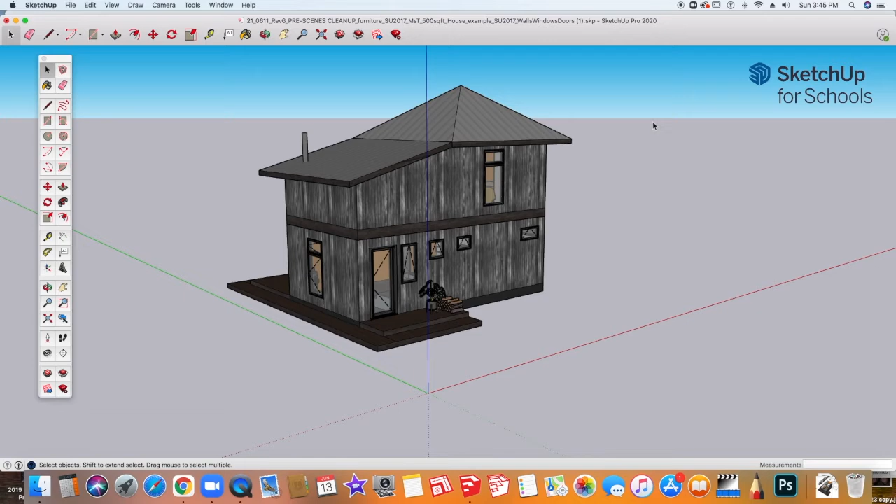An example of this is my current model, but an example of what we'll be doing is as follows. You see across the top here are different scenes, and these allow us to quickly toggle through, and you're going to make two 3/4 views, a front view in elevation, a right view in elevation, back and left views.

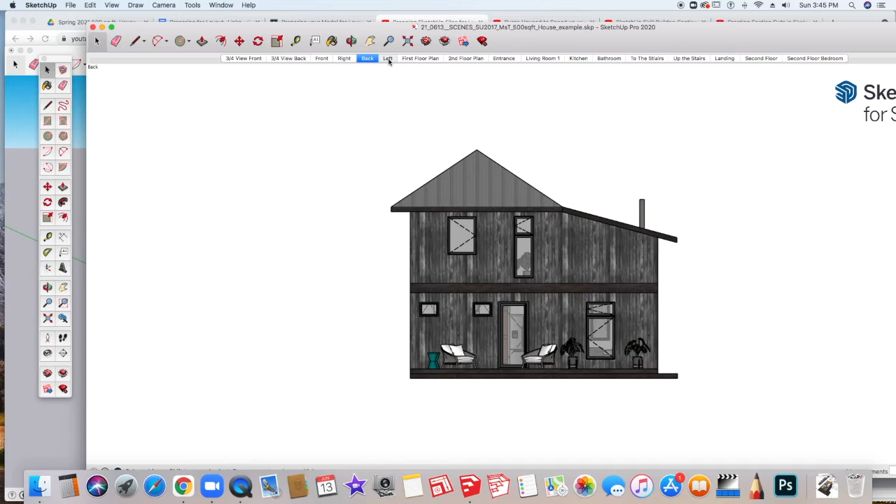Then we're going to do a floor plan. This is the first floor, the second floor, if you have a second floor, and then we're going to do some interior views. I only ask that you have at least 2 interior views, but you may want to do more once you get the hang of how this works.

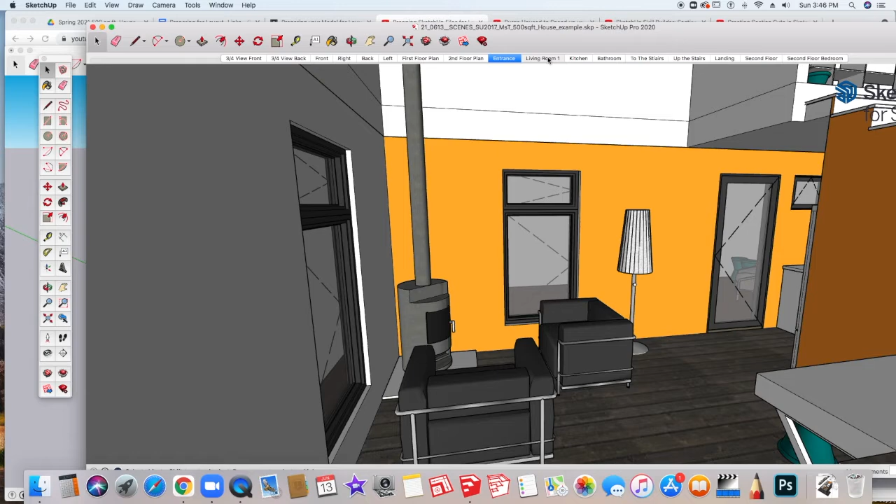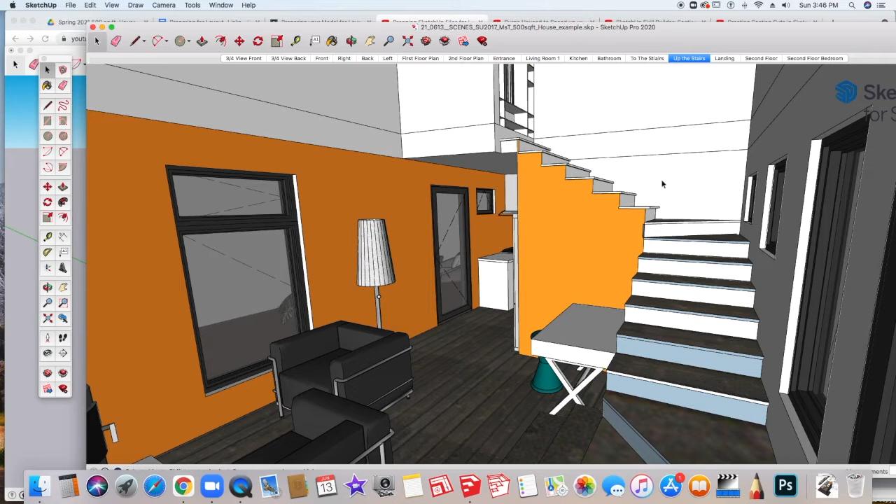So mine include both the entrance, another picture looking from the kitchen into the living room, then from the back door looking into the kitchen, the bathroom looking toward the pocket door and kitchen opening, and then back to the back door looking at the stairway going up, standing at the first landing, and then standing at the second landing looking into the living room, and then at the top of the second floor looking down into the living room area, and then looking to the left and looking into the bedroom.

To create these views, we're first going to have to start with making some section views. We do this first so that it doesn't become complicated afterward. There's a method to the progression of how we work.

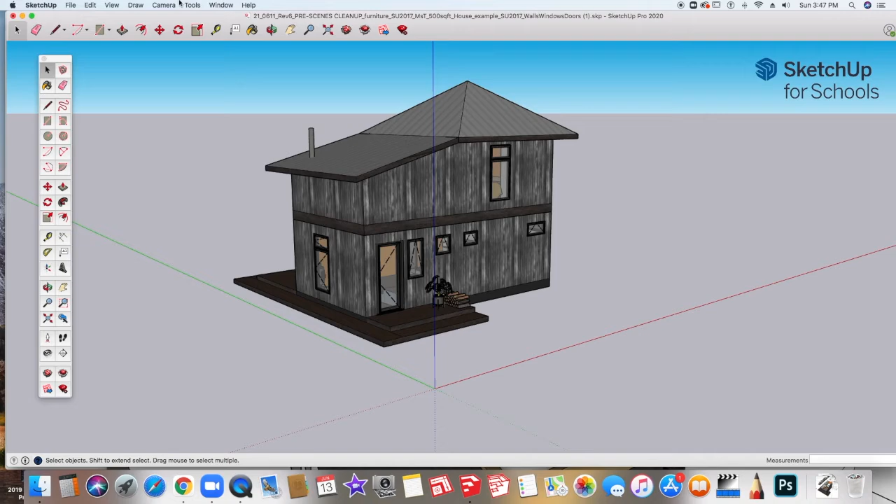In order to do the section views, we're going to be opening a few new windows that you haven't used before. This will include the Styles window, and all these are located up at the window upper menu, Outliner window, and we're also going to get the Scenes window up. Now remember, you can move these around and utilize them so that you can sort of see what you're doing.

The first thing we're going to use is the section tool. The section tool is located down here at sort of the bottom of the toolbar. These are navigation tools. This is similar to Google Earth. If you put a person in a particular location, it will set up the view from that area, and then this is the eyeball of that person.

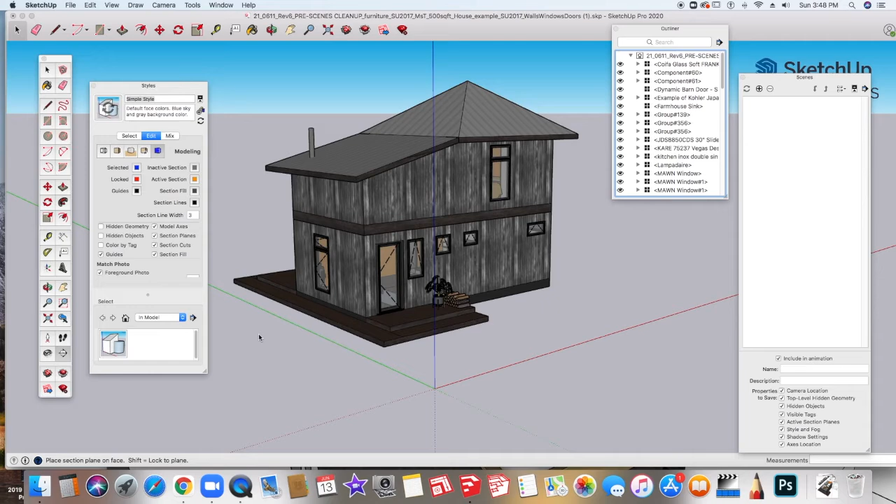But right now we're going to use the section plane. Section planes work like a lot of other tools in SketchUp in that they kind of glom onto the different axes. So the red axis, the green axis, and also the blue axis.

Now we're doing floor plans, so obviously we're going to want to go from the top view, and you can control these just like you can control the other tools with the arrow keys. So left is green, right is red, and blue is straight up and down.

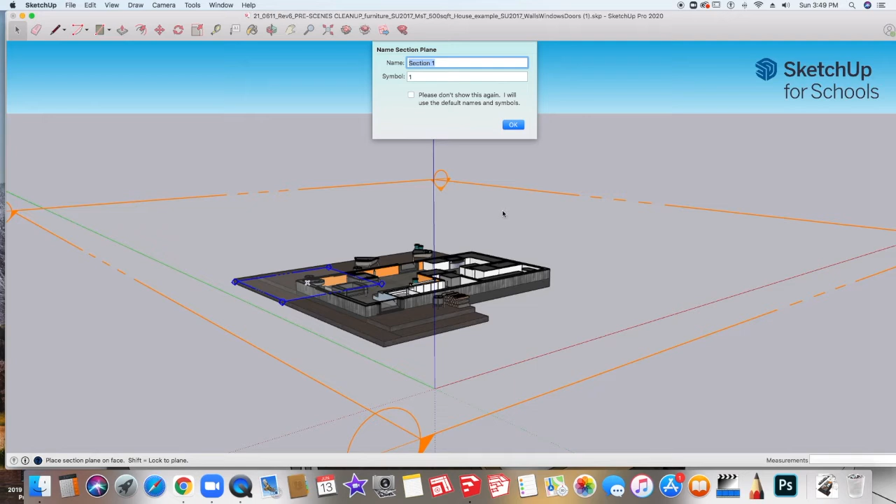I'm going to go ahead and click that, and you can see that this is probably making a large section plane, but don't worry about that right now. You're going to get a little box that's going to come up, and you're going to make a section plane name. You're going to leave the word section in it because we're going to be looking at it in the outliner tool, which organizes everything alphabetically.

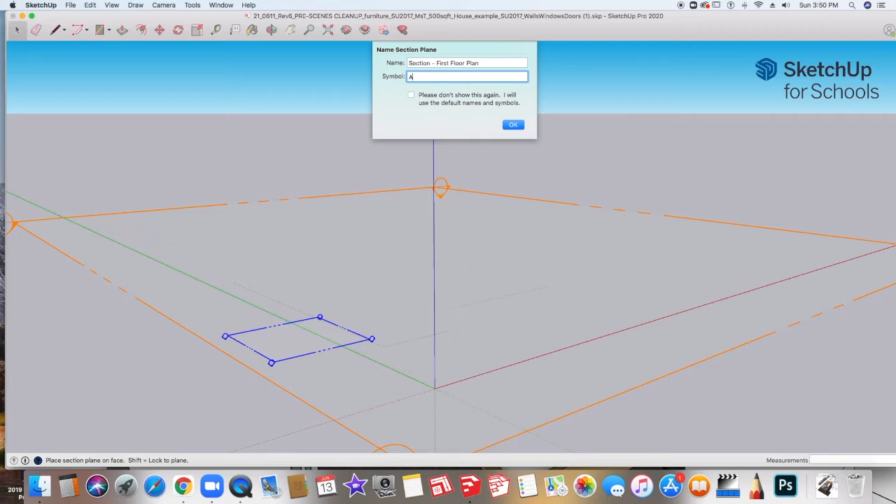So I'm going to put in section and then first floor. You can write first floor plan if you like. And we're going to put a symbol number in here. I'm going to use A for my first section. And what you'll see is in the outliner tool, this section name will show up down here under section.

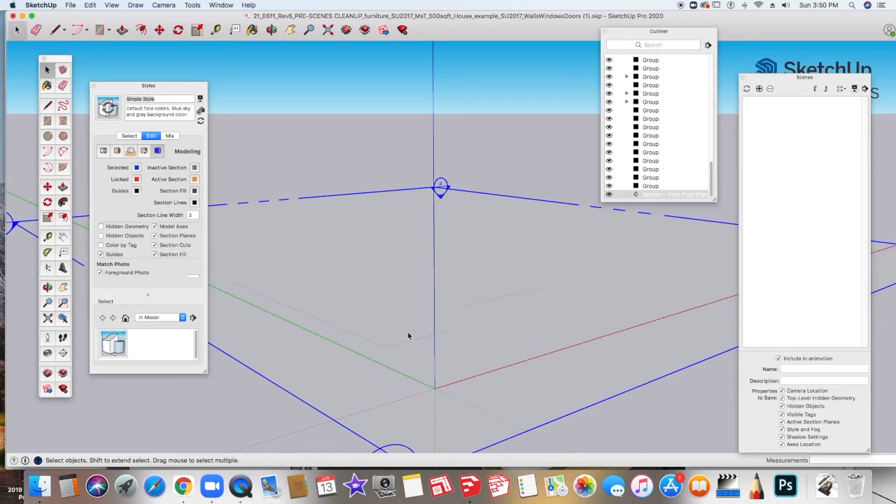Now obviously you're not seeing anything right now, so we need to select the section plane, and I'm going to use the move tool, M, and I'm going to start to pull that up. And you can see that what this does is allows you to make a section. It cuts the model across.

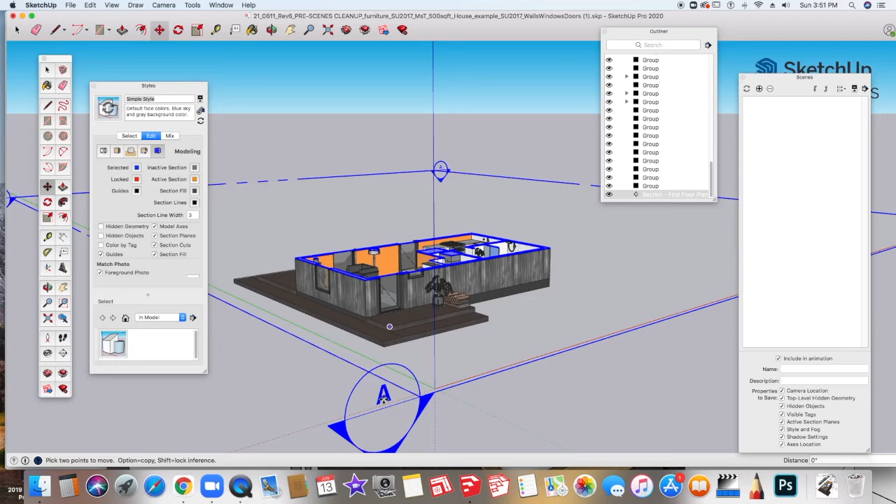And I have 3 windows up here. Normally a section view, like a floor plan view, would be done at the 4-foot mark. That's so you can see things like where the kitchen counters are and things like that. But I'm actually going to raise mine a little bit higher because I've got some higher windows that I'd like to show. So I'm just going to pull this up perhaps to about here, and you can see that I'm getting those higher windows in the bathroom and over by the stairway.

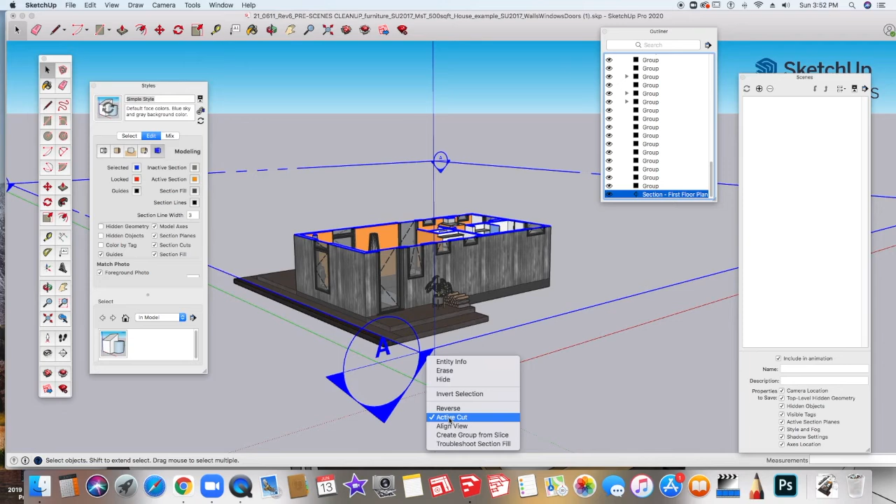When I do that cut, it shows me roughly where the cut is, but I also need to make another section view up here, so I'm going to need to see the whole model. Next, I'm going to go to section view again, and I'm going to click the up arrow tool, then click at approximately the height I want to use for my section view.

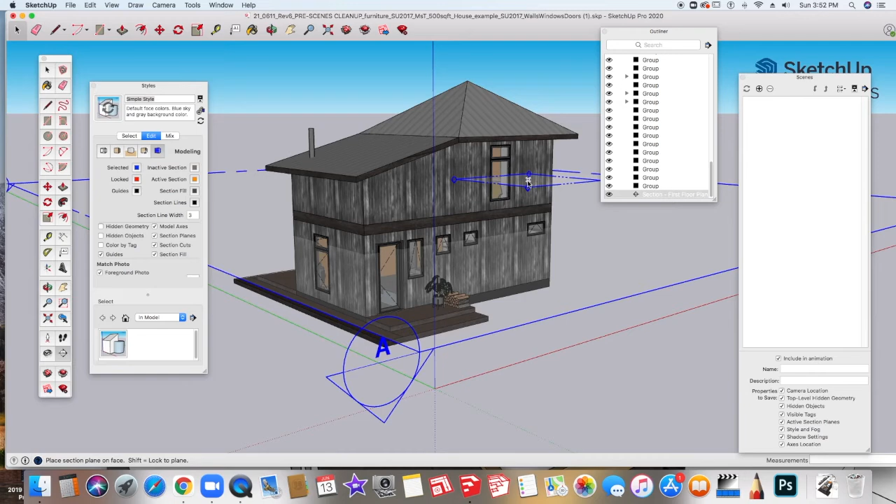This one I'm also going to call section, but this time I'm going to call it second floor. I know not everybody has a second floor. As far as symbol, I'm going to call this B. This is my second section plane.

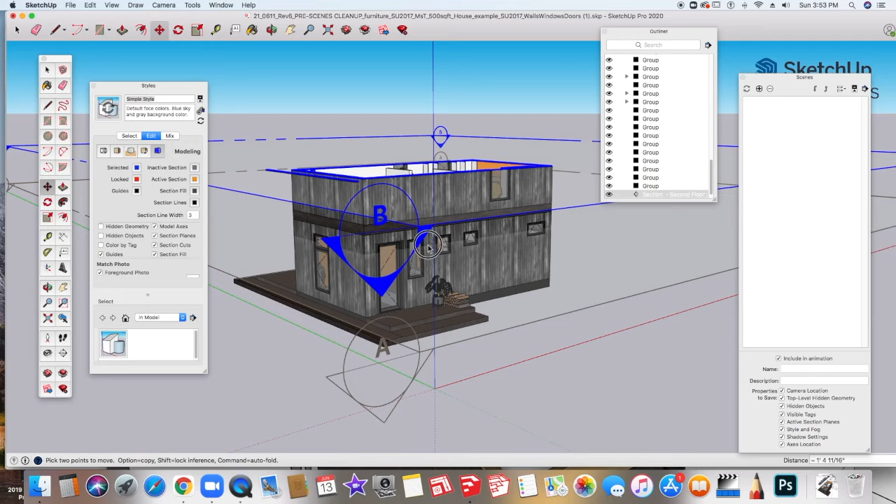Now with this one, I can select it, and when I do, it makes it the active cut. So again, I can take the move tool and move this up. I may want to show a little bit—I kind of want to keep it just below that roof line, but high enough that I can see the section views there.

Now I'm going to do the same thing: right click this and turn off the active cut. Now I can see the whole model. If I scroll down here on the outliner window, I can see both my section cuts. With my sections done, I can now focus on the other views I have to create for my scenes.

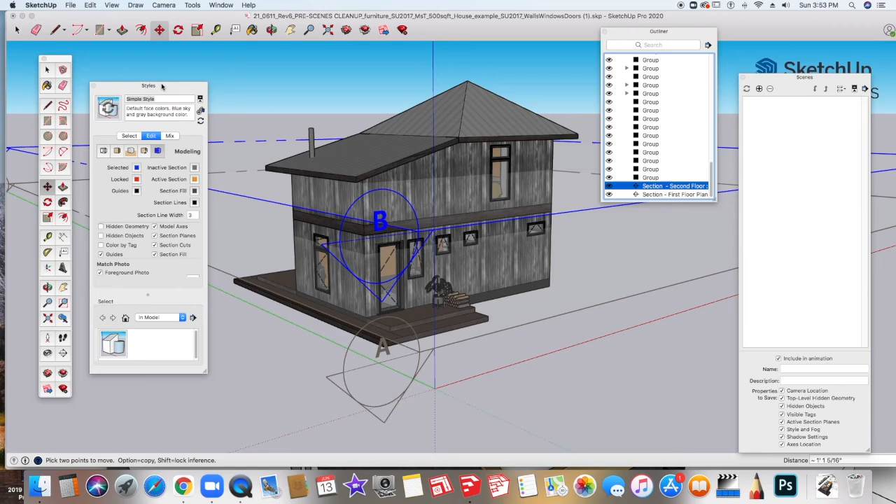I'm going to activate this cut. I'm going to come over here and say align view. Here is where you can actually see what it would look like. I'm just going to deselect this—use the selection tool and click outside the box to deselect it.

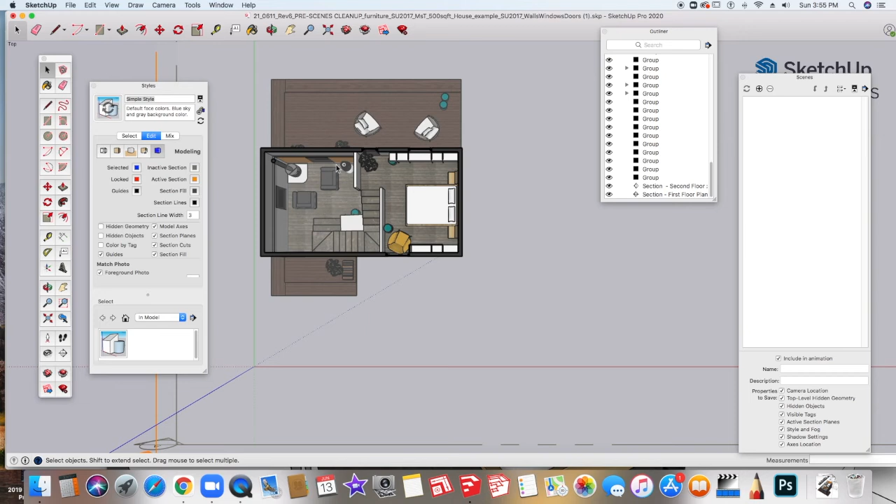Under the styles menu, you can start customizing your model. You might notice the fill might be a black color. If it's too much, you can change that by clicking on the edit menu, then section fill. For my model, I'm going to keep it pretty simple—I could keep it light gray. And there you can kind of see the section.

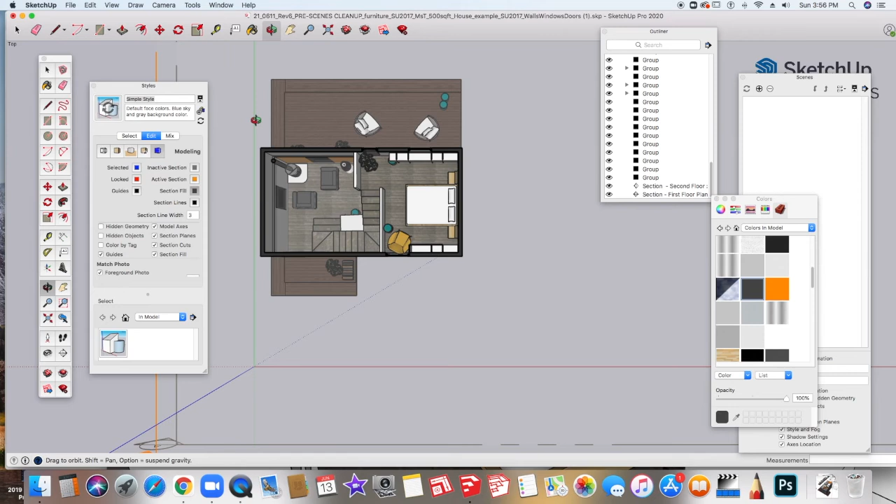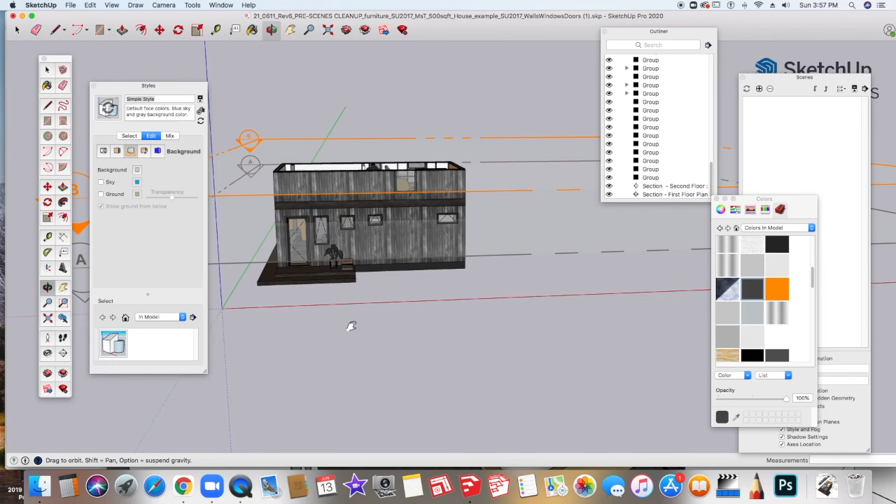A few other things you may want to do in this window: remove the axes points, and maybe change it so you don't have the blue sky, so we can have a really nice clean model. I'm going to go over to this middle box, the background, and turn off the sky. You'll see there's an immediate change—right now it's all one even color. If I turn that on again, you'll see the sky, but for our purposes, we'd like to take it off.

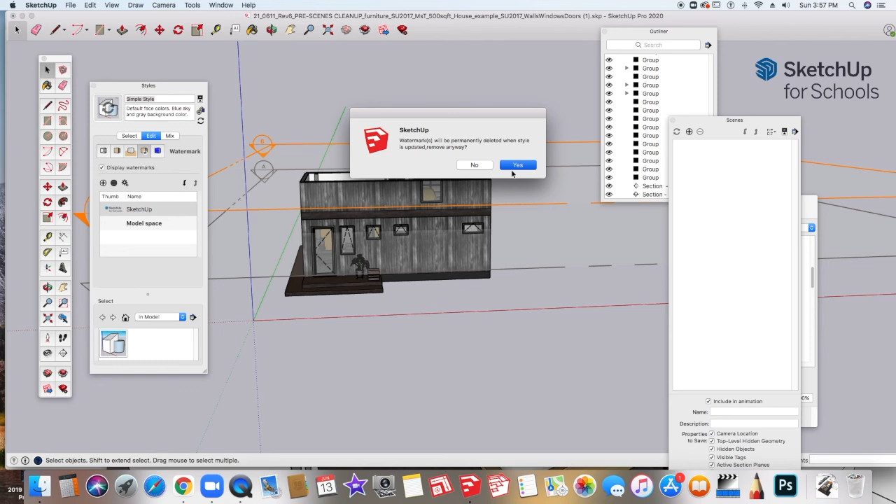You might notice we have that SketchUp for Schools watermark there, and we'd like to remove it. So I'm going to select it here, click minus, and say yes, we do want it permanently deleted.

The other thing we'd like to do is get rid of the axes that are here in the model. So I'm going to click model axes and uncheck that so they go away. Then I'm also going to go back and make the whole thing white because it will be a little easier to work with.

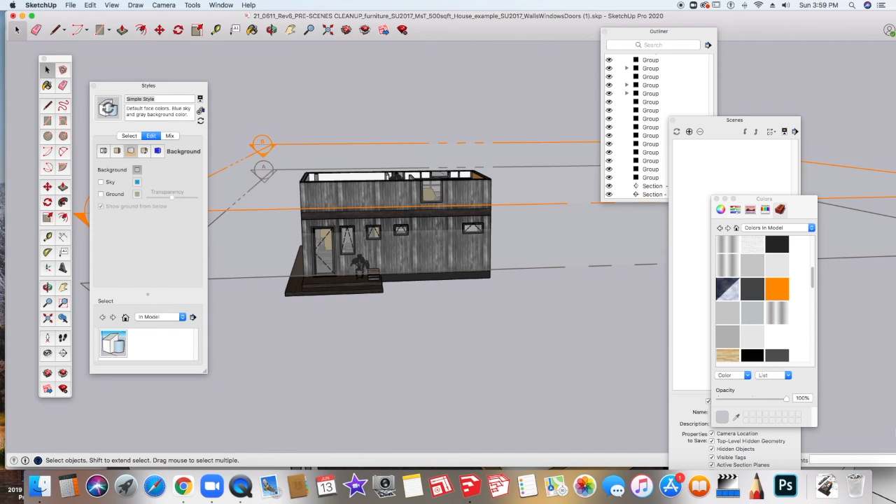So I am going to go back to my background. Where it says background, you can see it has this gray color. I'm going to change that to a different color. The main focus of this is your model, so I would suggest you could pick a lighter gray if you wanted, or a white. You might put this someday on a white background, and you might want it white so you can crop the images and so forth as you need to.

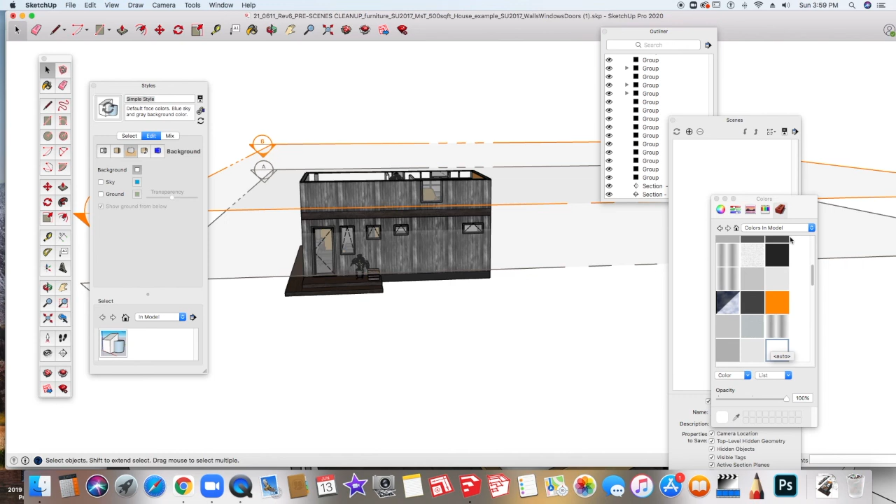We're just going to set that model up, and now I'm going to go back to my section view, and I'm just going to hide the section views, and then we can go ahead and start to create our scenes.